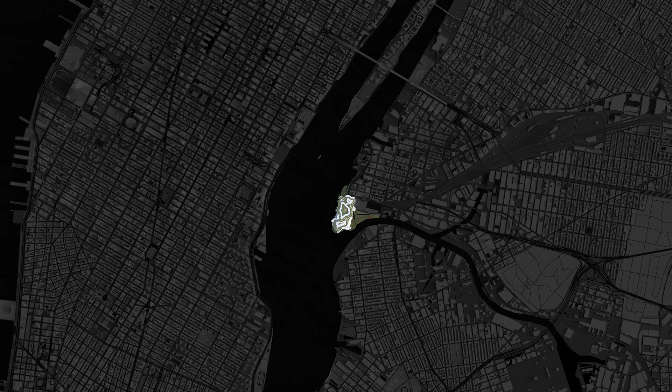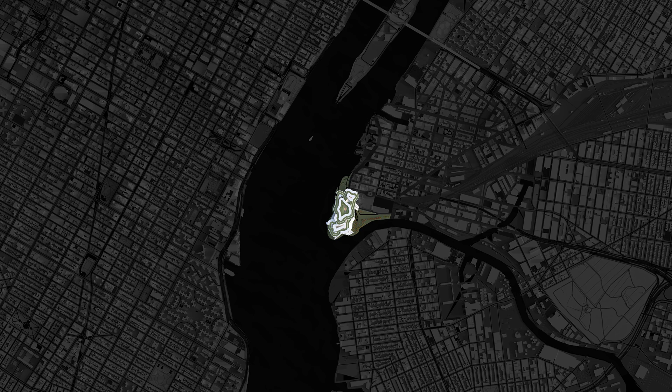The expanding loop aims to reestablish the current assumption of large-scale urban complexes, rather than purely focus on the mass of the volume as a traditional and conventional approach. We decided to center our efforts on discovering new ways of conceiving mixed-use projects, with an emphasis on its edge conditions, i.e., its envelope, where all its urban social qualities are expressed while directly affecting its internal organizational strategy. With the notion of an expanding loop, this project makes infinite the idea of the edge in formal terms, as well as the expansion of social interactions with a continuous and contained complex.

We are intrigued by the thick graphical language and compositional complexity prevalent in medieval city plans. Focusing on the city of Deventer, its capacity to find sinuous edges in ways that, though not desired today from obvious aspects of social integration, is the seed of a potential for a new urban configuration. Through the process of disassembling, we analyze the offset logic initiated with the zigzagging edges to extrapolate the resulting heterogeneous shapes. The offset zigzag line not only creates a strong visual boundary, but also enhances the layering quality of the fortified structure.

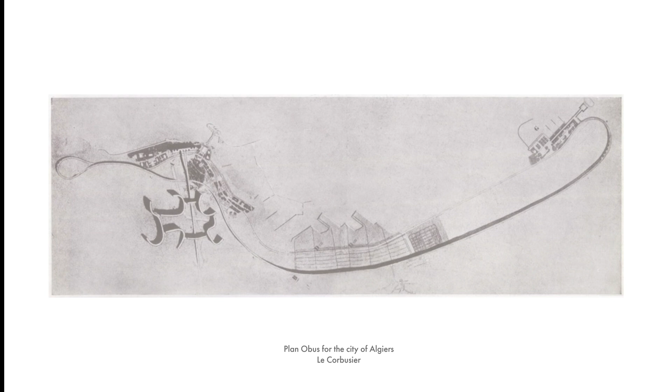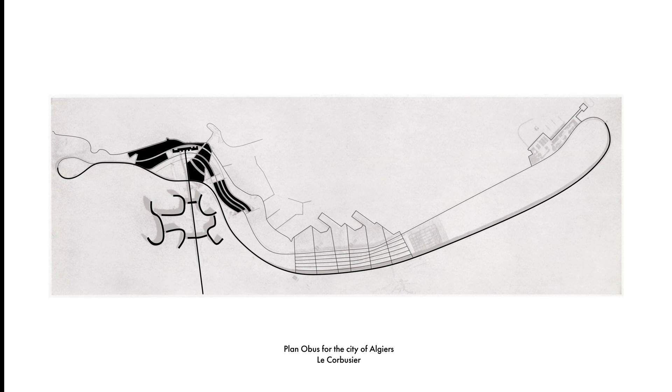Alternatively, in Le Corbusier's Plan Obus for the city of Algiers, we understood the edge as a thick urban mass rather than as a separation between adjacent territories. It combines urban infrastructure with living spaces, places residential blocks underneath the highway, while creating a conglomerate of linear and divagating slabs. It creates another aspect of graphic mass which is interesting to us.

Borrowing and combining aspirations from these two distinct conceptions of urban edges, the zigzagging medieval city walls and the winding curvilinear blocks of Plan Obus by Le Corbusier, our thesis project proposes a new typology for dense urban living characterized by airy urbanism of layering and thick bending strips.

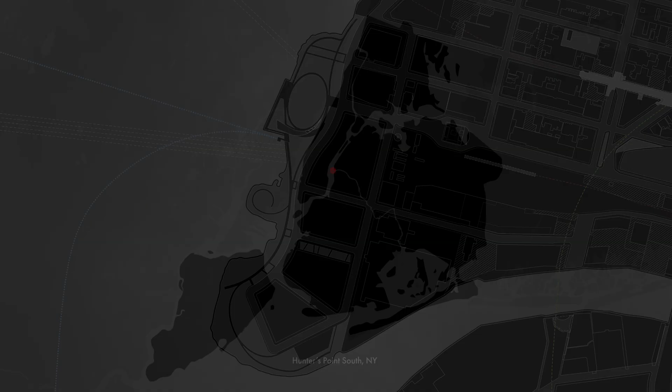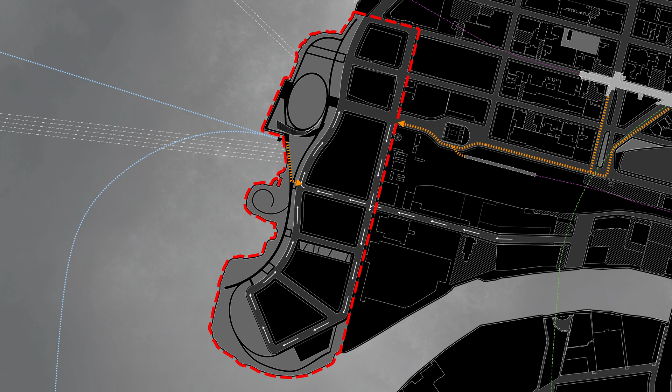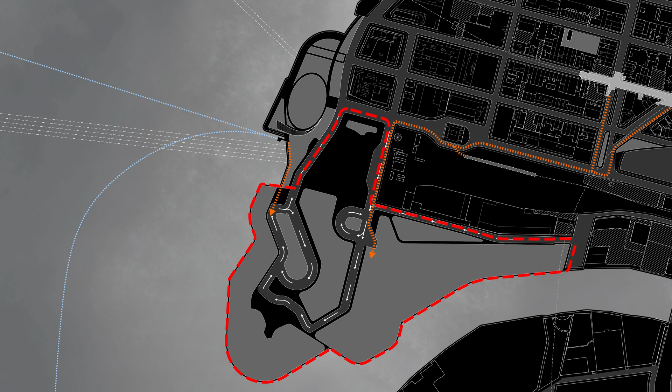The site, located at Hunter's Point South in Queens, New York, was chosen for its scale and central location. 3 subway lines, a ferry terminal, and a bus route service the site, forming a strategic network of transportational modes. The manipulation creates 2-way traffic routes instead of one-way traffic to benefit vehicle accessibility. The artificial landscape merges into the building that welcomes pedestrians from different directions.

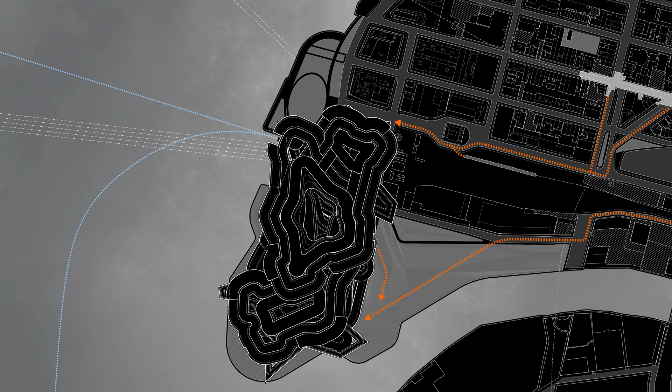In the past decade, the site has been transformed from its industrial past with factories and railroads to its present-day state with living spaces and green parks. Throughout the last century, the skyline in New York has been changed dramatically by massive constructions. Constrained by New York construction and linear infrastructure supported by aggressive capitalism of social exclusion, buildings are growing vertically, with increasingly narrow footprints.

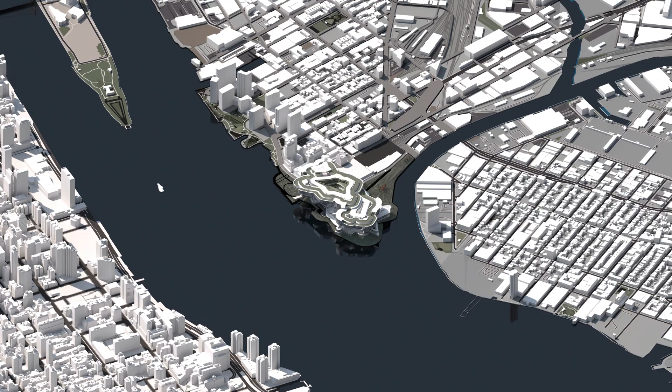Giving rise to the so-called pencil towers, radically opposed to the vertical tower typology, expanding loop creates a new horizontally expanding form of urban living. The building consists of 3 layers of continuous loops traveling across the site, breaking the homogeneous vertical development of New York, while providing a viable and bold alternative to the growing needs of affordable housing.

Approximately 5,000 residential units are placed on top, of which about 40% are affordable units, alongside apartments and condos. Different residential types are nested together, breaking the boundary between inhabitants from different zones. The middle part of the building provides offices and living facilities for residents and visitors. The commercial space and circulation spaces unfold at the bottom with the landscape on the ground.

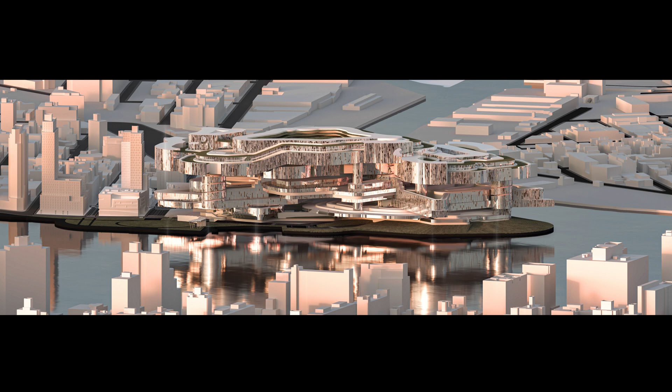Located at the waterfront and across from Manhattan, the building's waving loop takes full advantage to maximize its view for residents and other users. Looking from the outside, the building's mirroring glazing surfaces reflect the water and surrounding towers, creating a new mixture of contrast of different building typologies at this estuary location between the 3 boroughs in New York. Sprinkled with copper panels, the facade creates a sinuous, fragmented reflection of the Manhattan skyline.

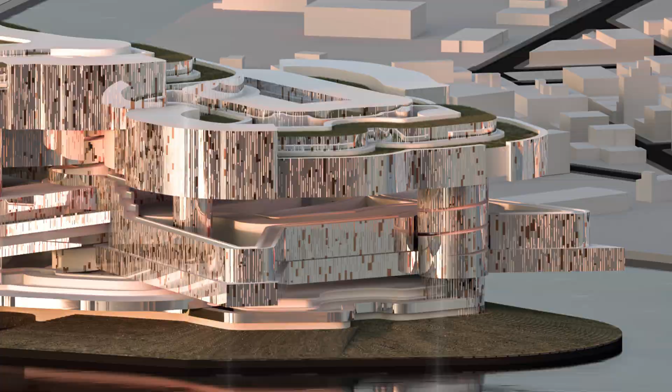At the ground level, the building is surrounded by a landscape that projects resilient efforts along New York City's waterfront to its neighboring boroughs. The open-air ground level integrates accessibility for the public through retail and includes transportation to all New York major lines. The overpass connects both ends of the site and merges into the park.

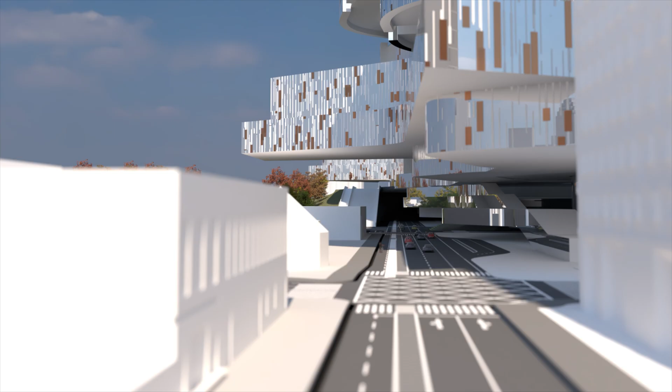The lifted ground level creates the public realm of the project, with public spaces and commercial areas. The entire lower region of the building brings landscape and nature into the site and intertwines the commercial and public urban scapes into the surrounding park.

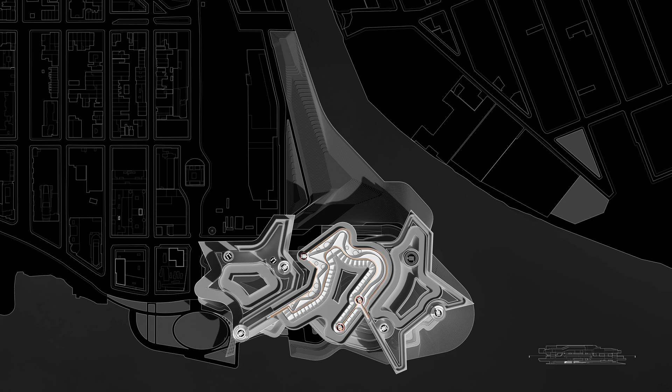The building is accessed through its middle region, which is the connective tissue of the entire project. Between residential and public areas, it acts as the glue and connective tissue for the vertical organization of the building, providing areas for the communal facilities including retail stores, offices, theaters, galleries, and event space.

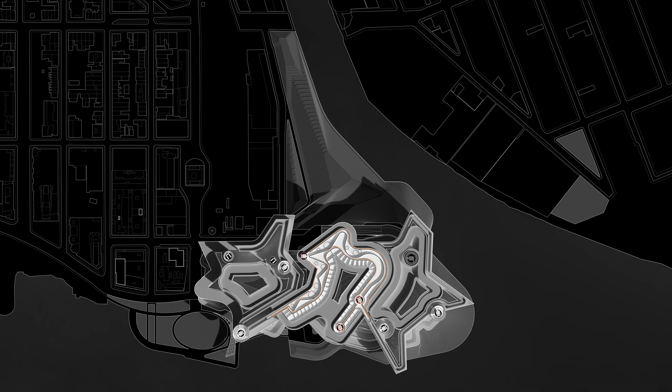The upper region houses the residential units, where it confronts the shapes and depths of the loops by using various types of rooms and organizations. This section shows the myriad spatial possibilities as residential, community, office, and retail areas intertwine.

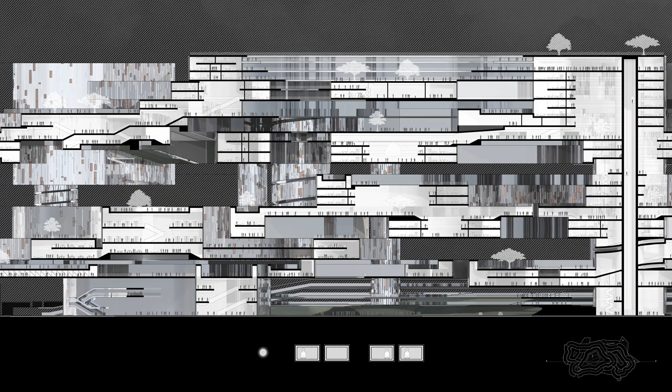Contrary to the hierarchical program distribution in a typical high-rise, these spaces are mixed together with more and higher degrees of proximity. The looped envelope links interior spaces through linear circulation flows, bridging one space to another. This increases social interaction between people inside of the boundaries.

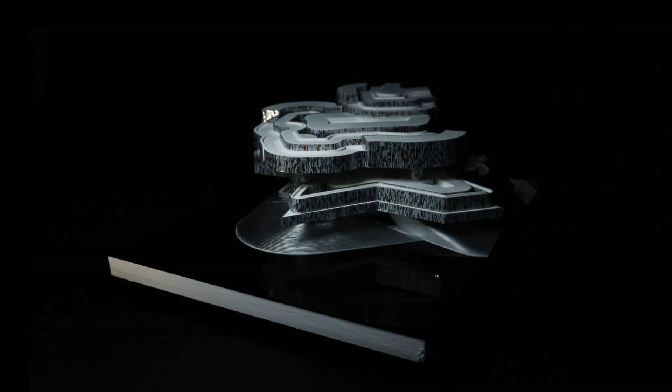Expanding loop integrates various edge conditions without the resulting physical barriers or social divisions of its predecessors. Instead, it creates a unified and heterogeneous mix of figural loops that make a new urban character at the edge of the city in the age of post-social distancing. Through layering, delaminating, looping, and subversive superimposition, these edges redefine the urban complex. This new typology for dense living features an airy urbanism of layered bending strips and pedestrian promenades in linear parks.

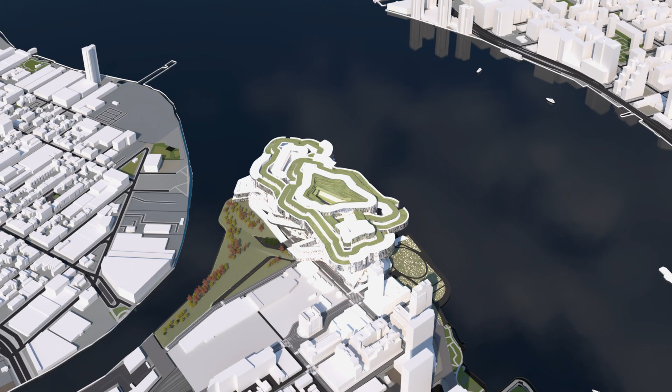This concentration of multiple overlaid open spaces and views establishes public accessibility for all. Expanding loop fuses these various edge conditions with accessibility to create a new urban character at the edge of the city. Thank you.